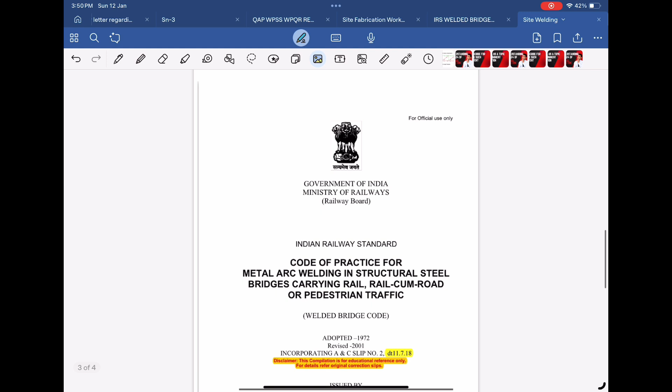In this video, we will understand the mandatory codal provisions that are binding in case we go for adopting site welding. IRS Welded Bridge Code provides for special provisions to be taken in case of site welding. Site welding refers to the welding which is done at site instead of fabrication workshop.

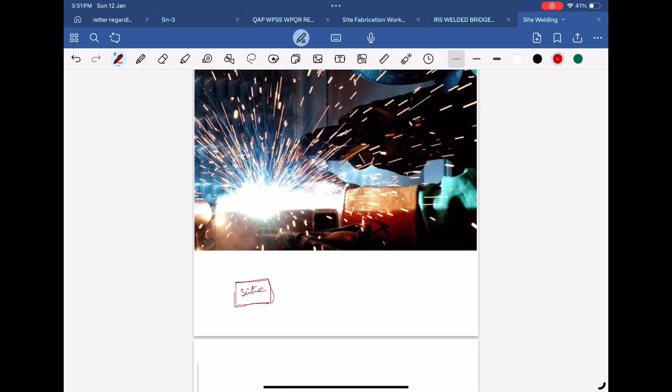Sometimes it is necessary to do site welding if a special girder arrangement is adopted where components or segments made of few components are to be assembled at site with welding. This is a typical case where fully welded bridge structures are adopted, like in case of RDSO standard, fully welded ROB bowstring girders. Now coming back to special care required to be adopted in case of site welding.

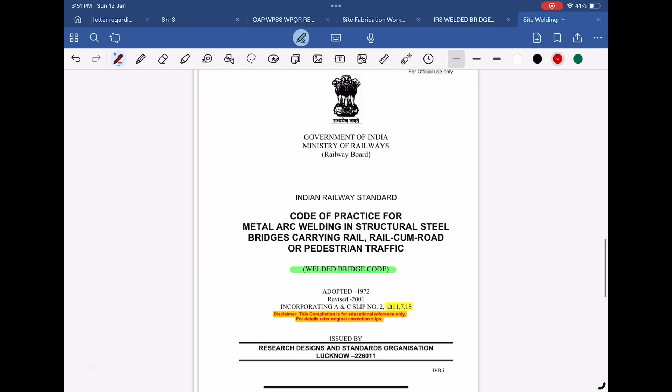Clause 14.1 of IRS Welded Bridge Code stipulates that permission of Railway Board is required for field welding. It means that zonal railways and PSUs cannot go for site welding without getting permission from Railway Board. 14.1 also stipulates that 20% reduction in weld strength will be done while considering strength of the site weld while designing such a joint.

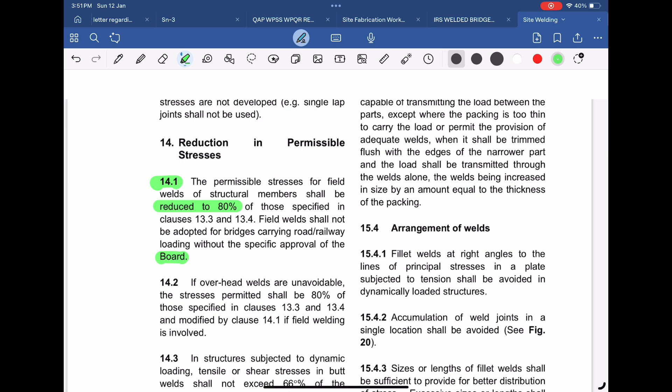Clause 14.2 further stipulates that a reduction of 20% shall be done if overhead weld is adopted. This is because overhead weld is a very special kind of welding operation, and it's very difficult to achieve proper weld quality in field.

Therefore, in case of field overhead weld, the strength to be taken in design shall be 64% of normal permissible stress, 20% reduction due to site welding, and further 20% reduction due to overhead welding. So 80% of 80% becomes 64%.

To summarize, first of all, approval from Railway Board is required for adopting site welding. A reduction of 20% shall be done for site welding. A reduction of 20% shall be done for overhead welding. Total reduction of 36% shall be done for site overhead welding. These reductions must be made in permissible stresses of welds, and design should be rechecked accordingly. This was all about the topic of site welding.